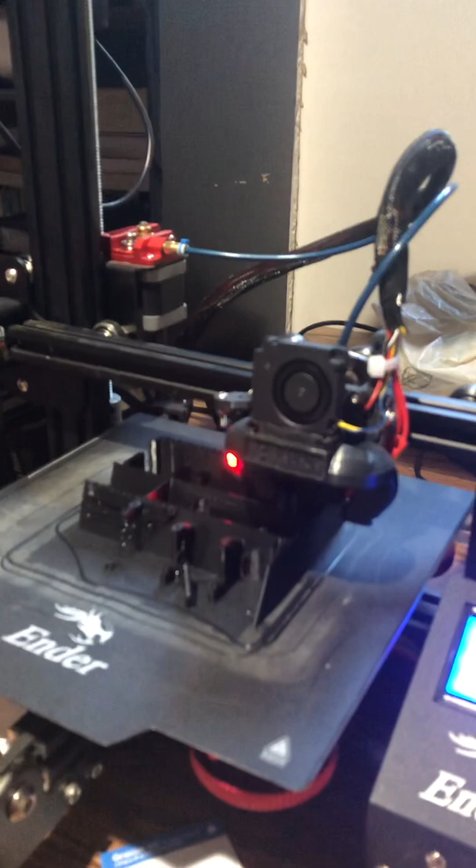Well, today is the deadline for project number 2 to be completed, and unfortunately, I had an incident with my print.

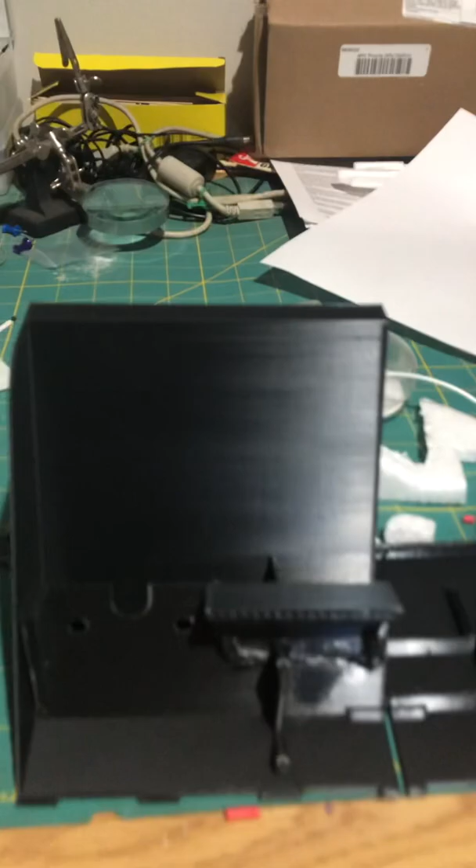The left-hand side of my project, very nice. The right-hand side got that much, and for some reason the filament snapped. And then it kept going, but it didn't actually print.

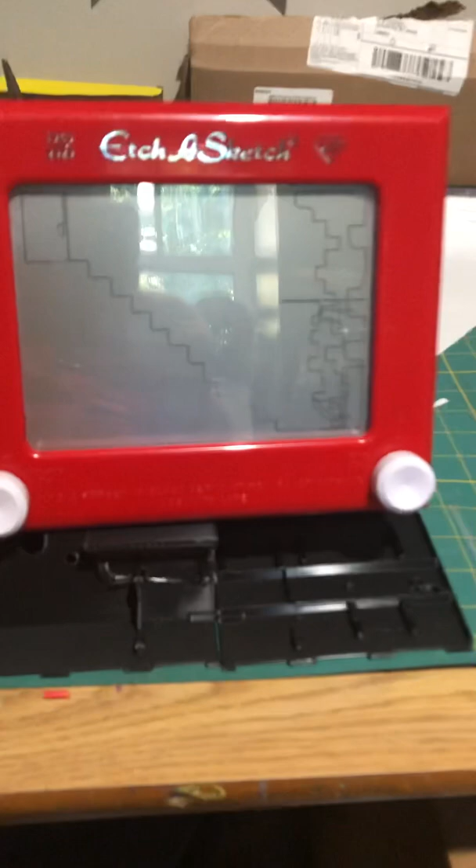So basically, my Etch-a-Sketch holder, like that, kind of failed.

So I managed to figure out dimensions and all that, and I moved it down and tried to reprint it, and it is working. There are a couple fail points, but nothing we can't get around.

As far as the Arduino is concerned, I have been able to control the Arduino. Yesterday I was controlling the X and Y just fine.

And I was supplying it on its own power. For some reason, it didn't seem to want to do it, so I had to troubleshoot why that is. And when I plugged it in off the computer...

I can control my X and Y axis with my joystick, which is what I wanted as my primary. So, basically, to understand where I'm at, the part that holds the joystick is there.

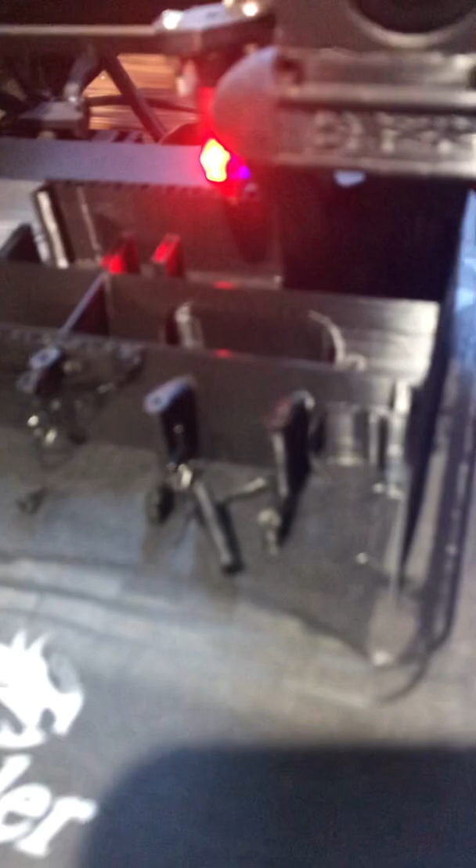These points. And the part that holds the steppers. Right here.

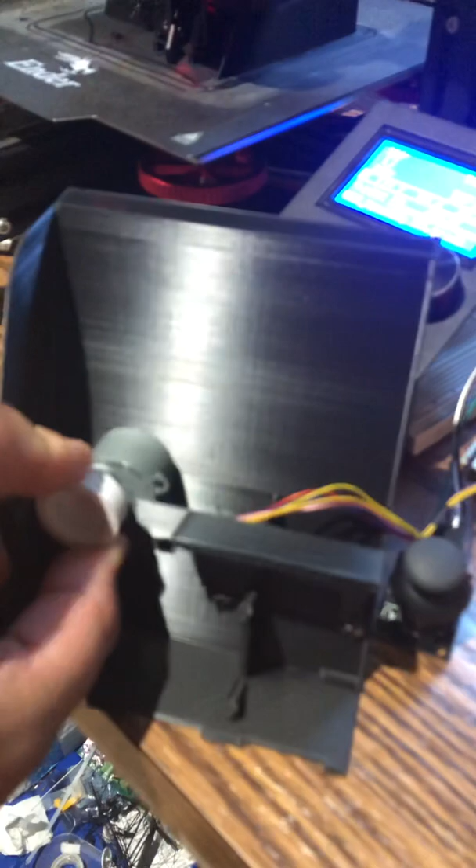These grooves are designed for rubber O-rings. Sorry that the video is really not clear, I must have something on my lens.

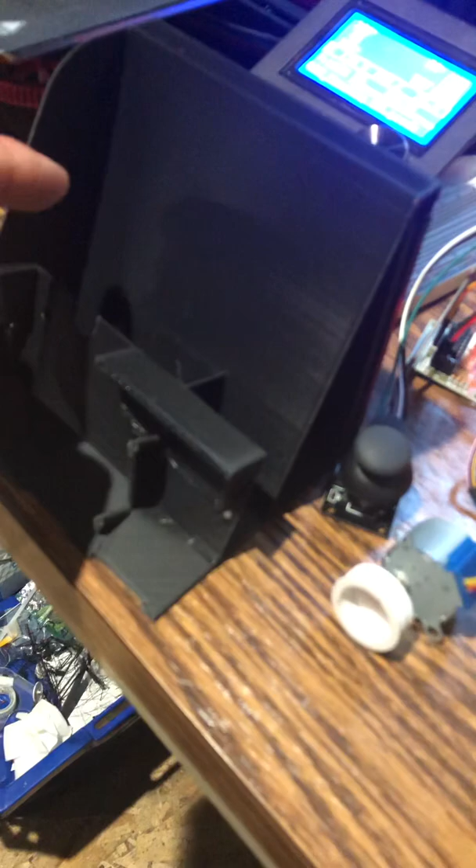I designed it with hinges so that I could put a cover over here. And I wanted to design that cover so that I could maybe put an idler wheel and clamp down to actually put tension onto the Etch-a-Sketch like this against the wheel.

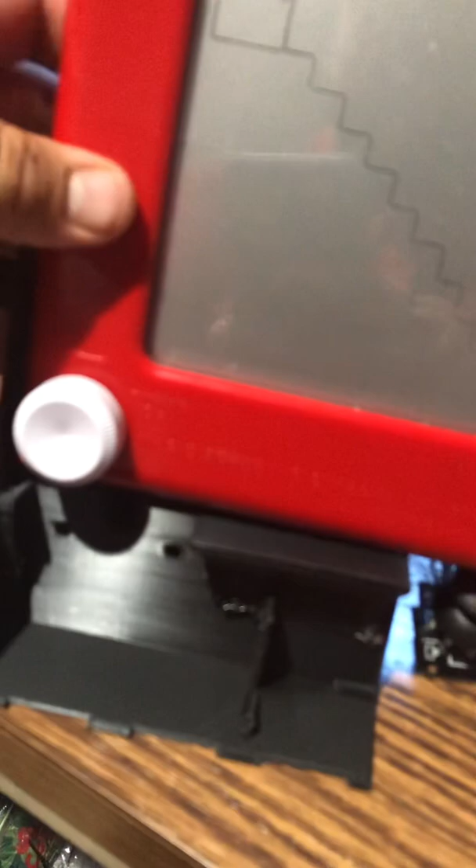Can you, Josiah, very carefully hold this? Can you hold the camera, please? You're supposed to be pointing at here.

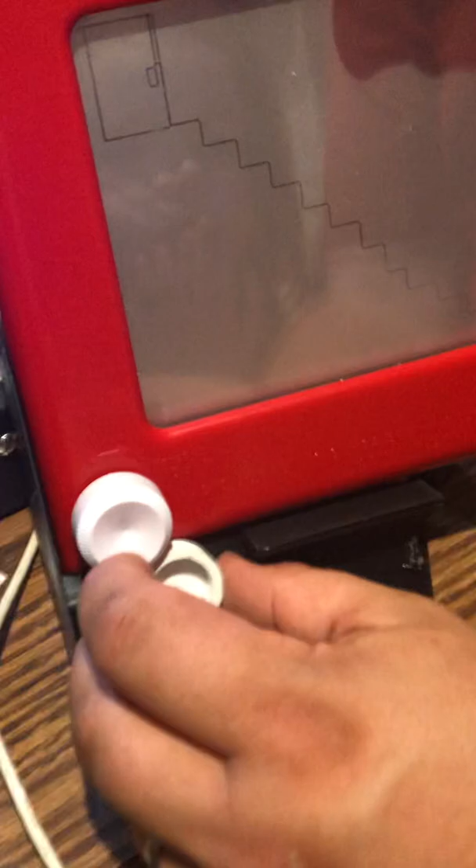This is designed to fit together like that with the rubber, and potentially a cover on here that has an idler that pulls this down with tension so that when this turns, it turns the main wheel.

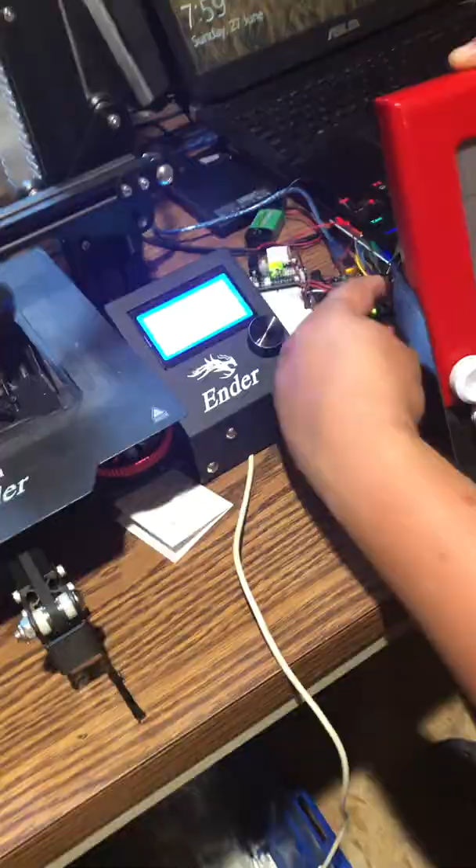In fact, I should be able to demonstrate the concept. I can find the joystick. Only I don't have the rubber seals on there right now.

So, yeah, it's not that complicated.

Can I please have this? I want this.

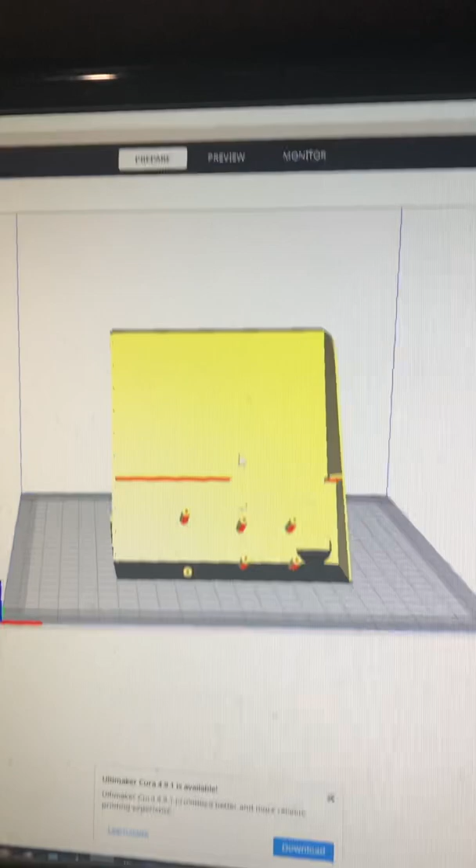You can see the printed part that I'm printing right now. That's the right hand side. You can see where I've got mounting set up for the Arduino board, etc. Pass-throughs for wiring. Pretty simple, straightforward.

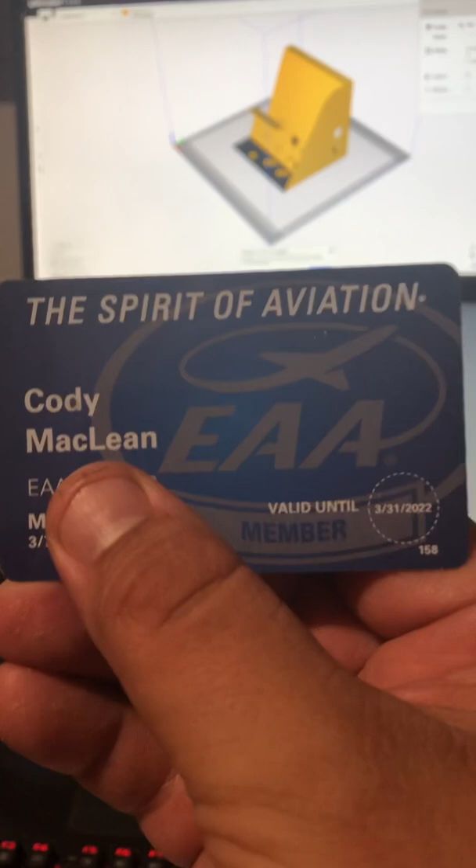I guess SolidWorks is actually open. I'm sitting here waiting for it to open. It's actually open. So, automatic Etch-a-Sketch.

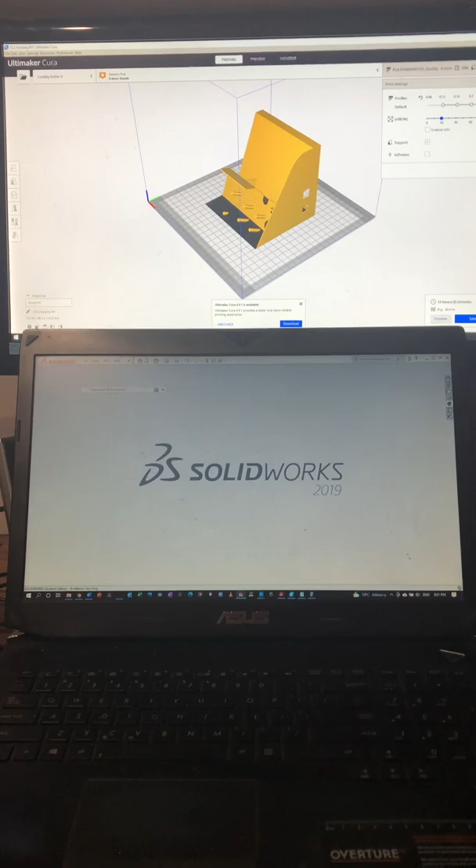Here is the automatic Etch-a-Sketch. And you can see the principles there. Somebody had suggested that I make mounting for the boards and stuff at the back.

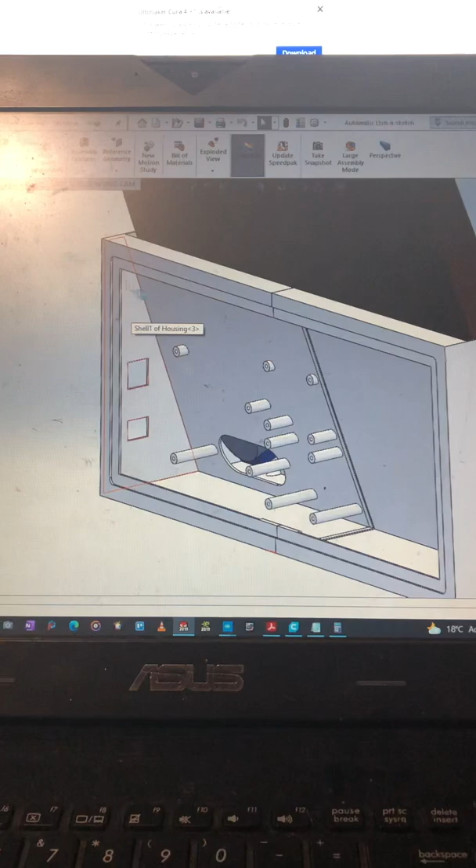That was the plan in the beginning. I had designed a removable cover. I haven't printed that cover. It's not highly important to me.

But you can see with my standoffs and pass-throughs, etc., that I can put a motor driver here, a motor driver here, and the main Arduino board here with its power and printer cable.

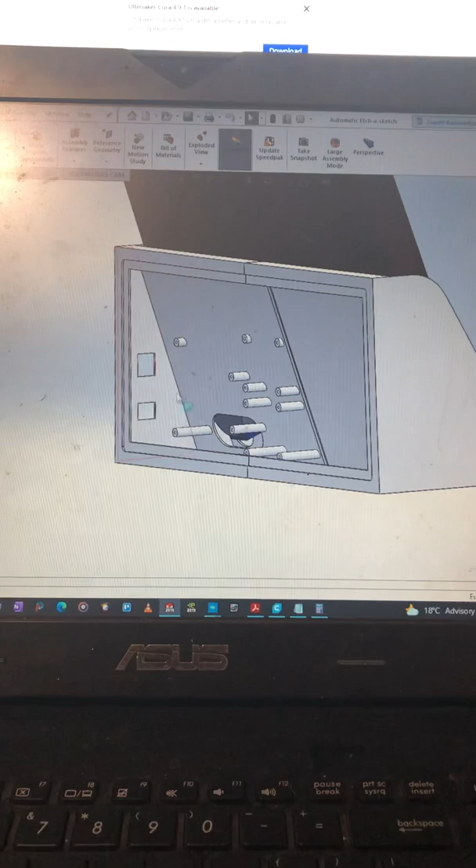The seam is where the two join together, and I've got an overlap, so it's going to fit tightly. I did...

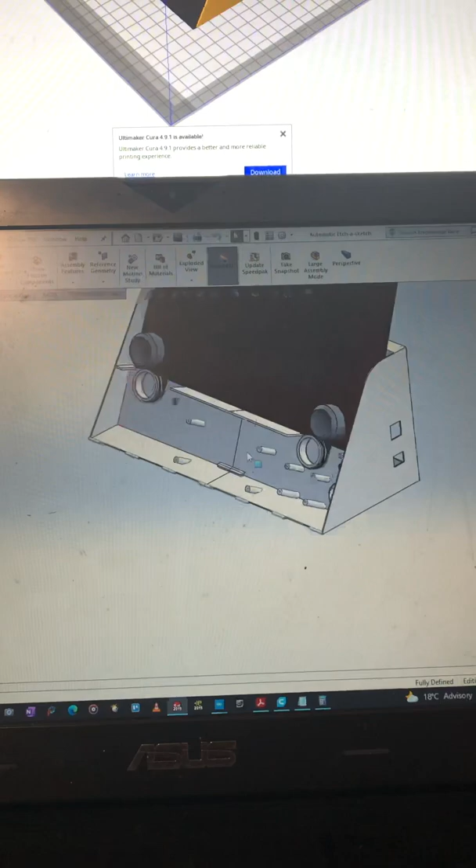try to set it up where I could sort of put a screw and nut and that kind of stuff together in a few places, but then I realized that I calibrated my scale wrong, so that's not going to happen. I might put dowel pins in there, but at this point it is just going to be super glued together, especially considering that whole bottom plate is now separate.

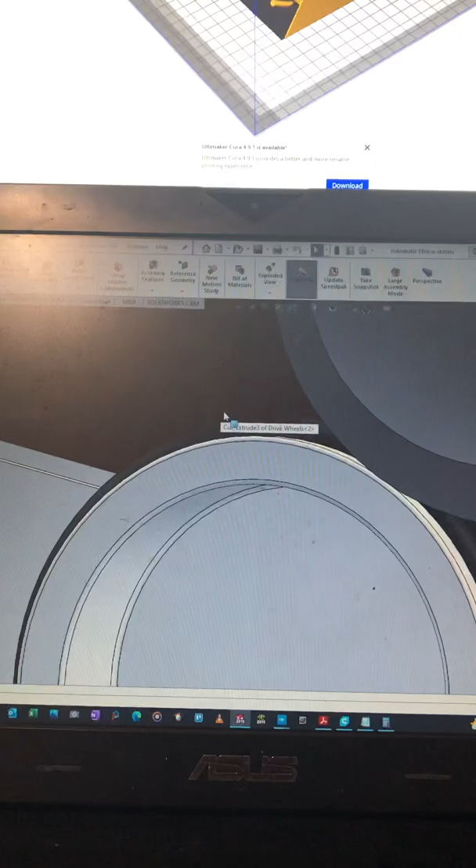You can see the drive wheel with the rubber seals on it pressed up and interfering with the knob on the Etch-a-Sketch. I drew the Etch-a-Sketch first, and then I drew the motors, the servo stepper motors, made the caps, and then kind of went around it.

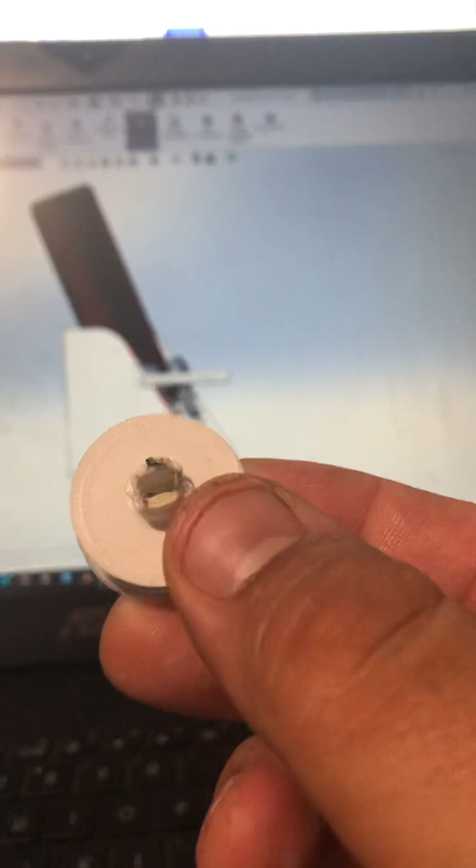My first attempt at a cap was right here, and I just made my tolerances too tight to heat it up to get it onto the servo, and that's why it's all melty looking. After that, I just adjusted my sizes, and it just press fits right on the end of the servo.

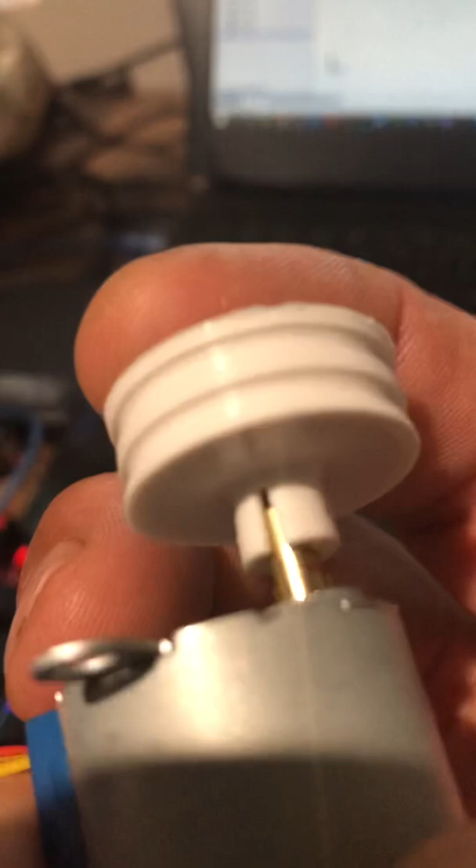It's not flawless. I'd like to print another set that fits a little better, maybe with a set screw. I was kind of thinking ahead on a holder for a set screw, but didn't end up doing it.

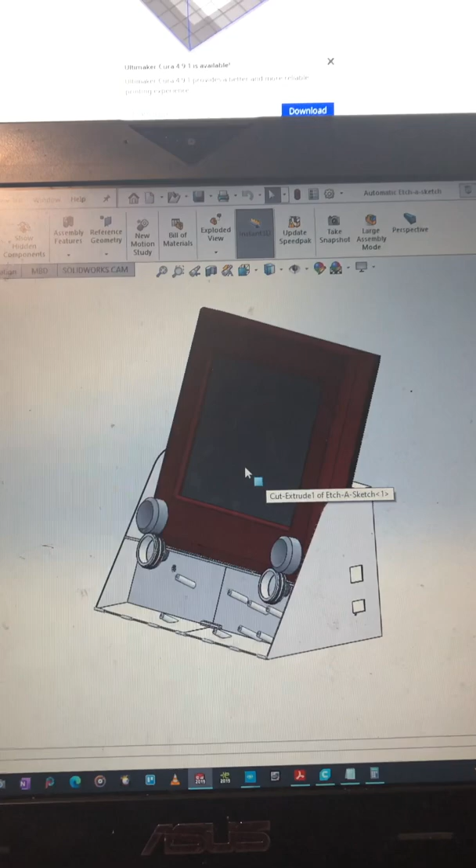Unfortunately, timing hasn't been my friend. There's just been things - it was at my good friend's 50th birthday, and a lot of things come up. When you're doing this with a full-time job and 4 kids and a wife who works too and all sorts of stuff, it's hard to get these deadlines that Mr. Rober has put together for us.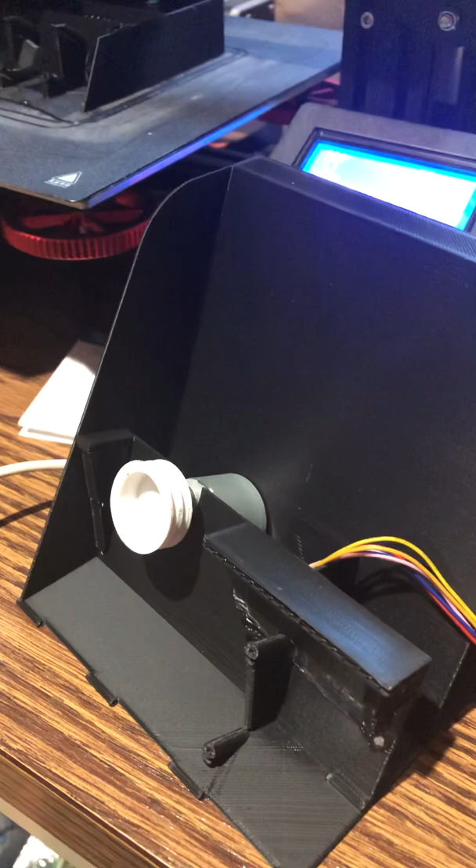But hey, it's a 1-month course. Probably people wouldn't do it if it was too long. Anyway, we'll put a marker on here.

Now, in code, I can calibrate the speed of that, but I like the precision. Having played with the Etch-a-Sketch, that's great precision, and being able to run both at the same time, depending upon the combination of X and Y.

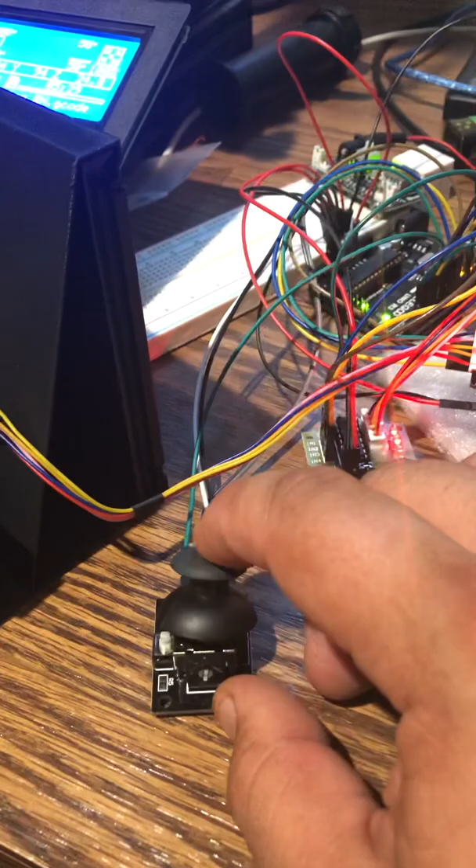To me, that's great. In the future, I'd like to make it so that I can upload G-code pictures into it, and then be able to run that. Kind of like what Mark did with the dots, the stippling, I'd like to do with the Etch-a-Sketch.

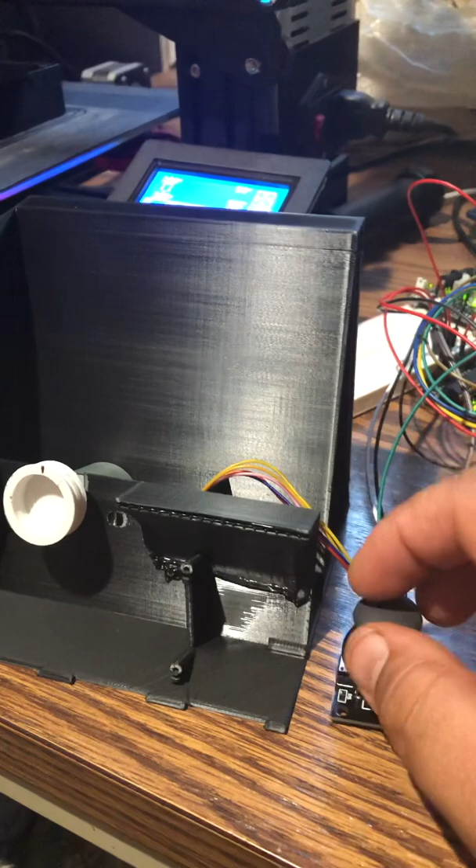I would also love to do fractal images. That's actually what I'd really like to see with this machine - to see it create fractals, and you know, until of course it's got too much on the screen, then I wouldn't want to go too far with it. But I think it would be really neat to see what we could do with that.

So just kind of random images or something like that, or scenes or something like that. Anyway, that whole notion excites me, but I haven't figured out how to set that up yet.

It's been so many years since I programmed in C++. The last time I did it was actually for an Arduino, for a special throttle control system we had to do for a special project for prisoners. I had to program a controller system for that. But other than that, I have these decades that happen in between.

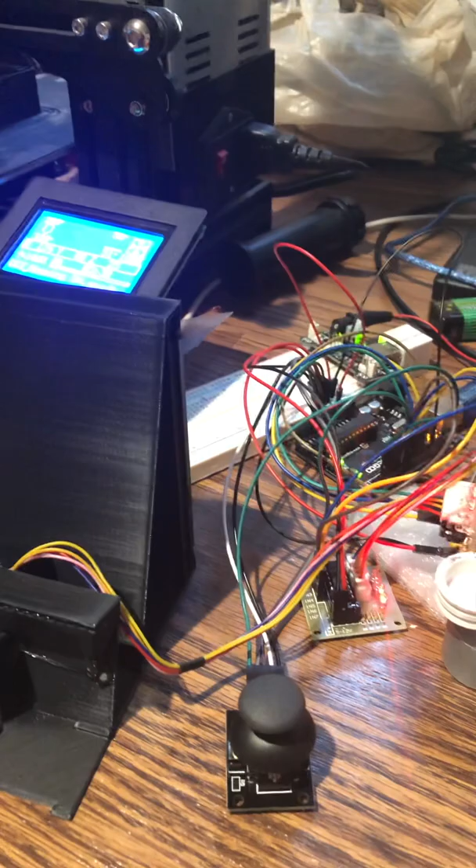So here I am, trying to remember my if-then statements and all that sort of thing. It all comes back when you start doing it.

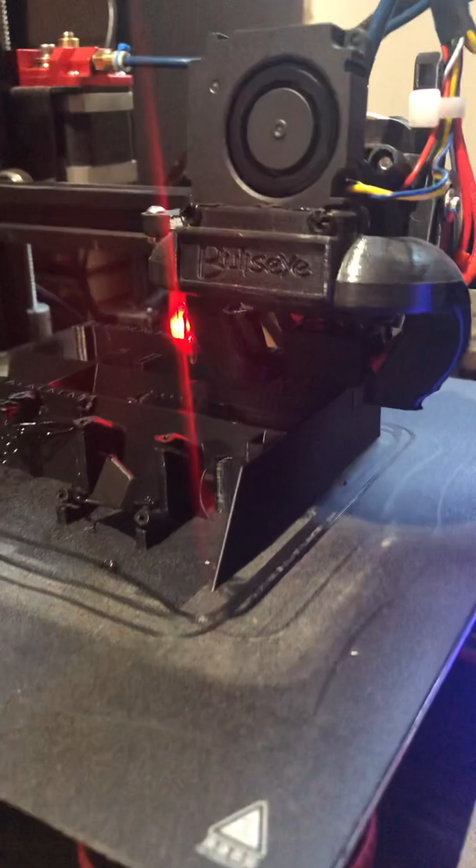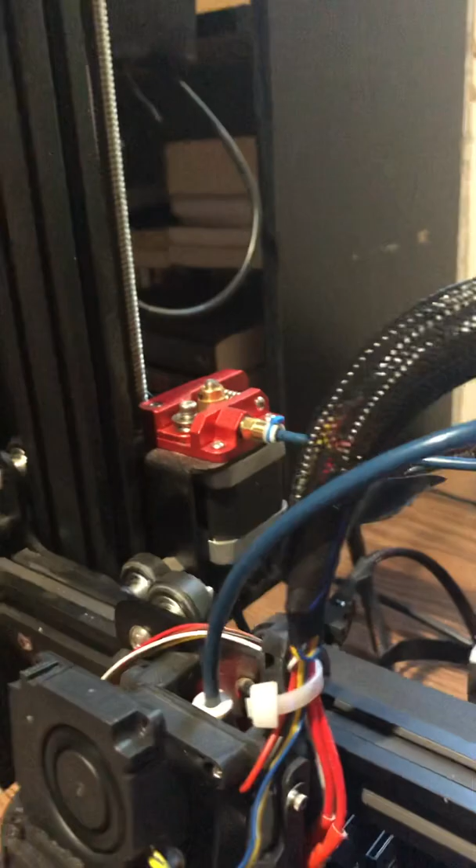There's my Ender 3 with Bullseye on there, BL Touch, and it's running on Marlin 2.0 something. In case anybody's interested, there's a Capricorn 2, I've got a metal extruder - it's not a dual extruder, I thought it was in the order, it wasn't. That's what I made, a little tray on the top, it's a bunch of dead things that I made.

There's another printer I've got to work on. It's running Duet in Marlin. Anyway, you don't know what I'm talking about.

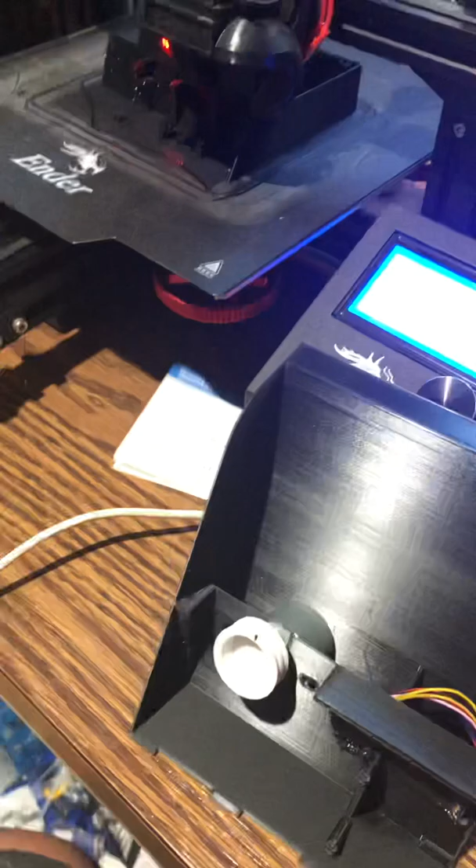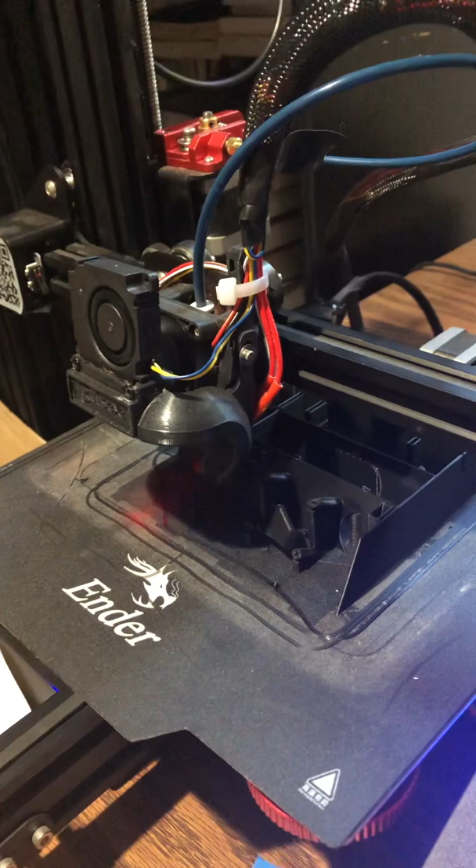That's okay. Anyway, I will try and have this together tomorrow, because that print, which has been running for 5 hours 31 minutes, is just over halfway - it's not done. So we're going to be waiting a little while before it is done.

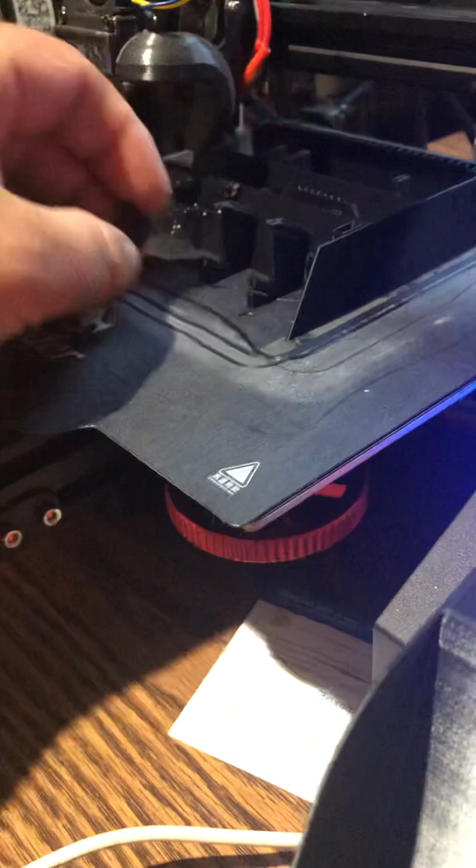Sorry guys, hate to not have my stuff done on time. It's been a tough week to actually accomplish things. So there it is, that's what I have to say about that. Check in tomorrow and I should have my update there.